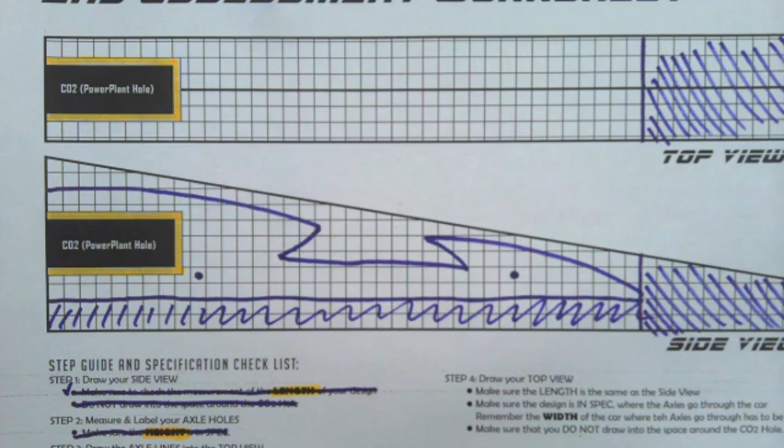Hey sixth grade, this is the instructional video on the top view for your second assessment worksheet. In the last video, we did our side view and made sure we went through our step guide and specifications checklist to confirm all specifications were correct for the side view design.

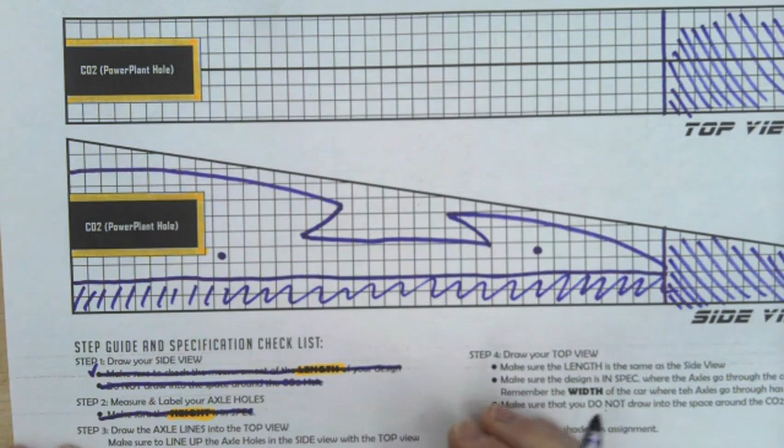Well, we have to do that same thing for the top view. Since we ended with step 2, we're going right on to step 3, and the same rules apply. If you know the specification and you're 100% accurate on it, cross it off. If you're kind of iffy about it, just put a check mark next to it. This way, when you hand it in, we can go over the checklist together and I can help you with the areas you don't know.

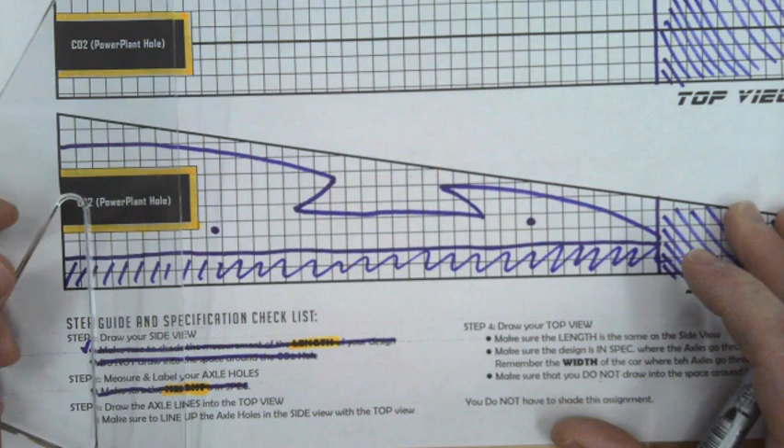Step 3 of this second assessment worksheet says we have to draw the axle lines into the top view. Just like we did with our brainstorming ideas, we're going to line up where our axle hole was with our triangle and draw a line in the top view. Remember, these must line up correctly. You're not making two different cars here, so the axles must be 100% accurate when we're lining them up.

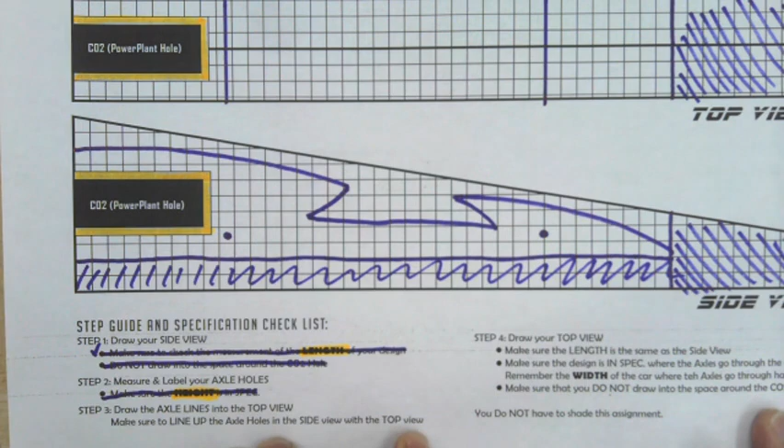Now that we have our axles in there, it says make sure to line up the axle holes in the side view with the top view, and that's what we did. So we're good there, I'm just going to cross that off. It's not a specification, but it tells me that I'm lined up and ready to go.

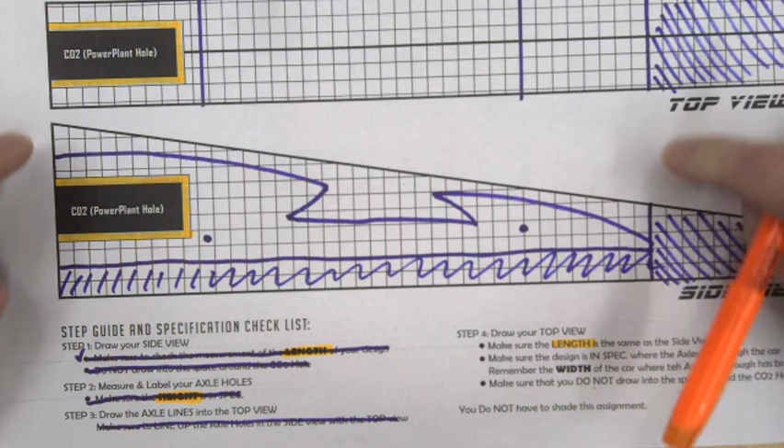Now we're going to get to the specification portion of this, and I'm going to bring up my highlighter. It says we have to make sure the length is the same, and we are. We set that up at 9.5 inches in our first one, and it is 9.5 inches in our second one. I made sure I ran that length up, so we're good on that.

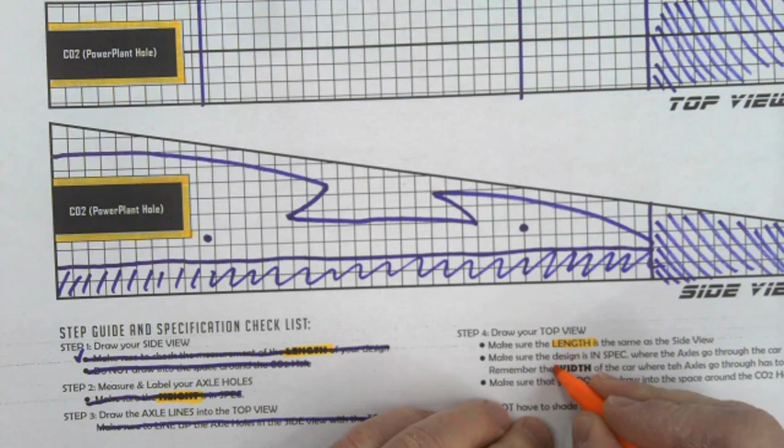Now we have to get in spec where the axles go through the car. We have to remember the width of the car at the axles that go through it to be in spec. In our case, the width is 1 3/8 inches to 1 5/8 inches according to the specification.

So I'll get my inch worksheet out and find out where 3/8 of an inch is. In this case, we're talking about 1 3/8 inches, so that means it's after the 1, in between 1 and 2. 1 3/8 inches is here, and 1 5/8 inches is here.

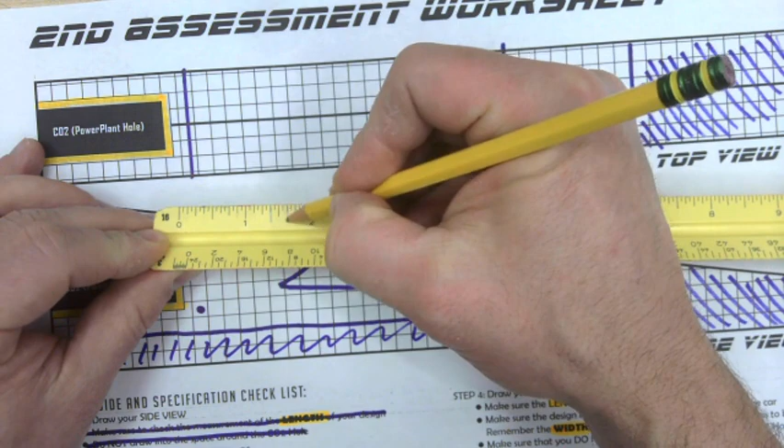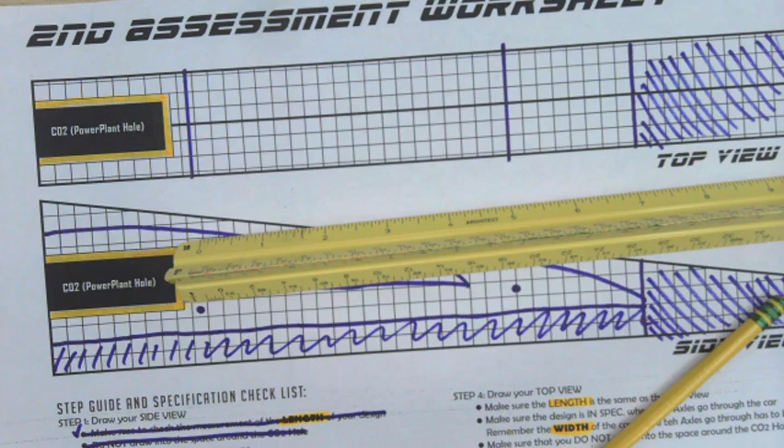For example, here's the car that I have in class. I left the wheels on here, but the other wheels are back here, so there are axle holes here where my other wheels would go. Where the wheels go through the car, where that axle goes through the car in both cases, you can see how the car gets wider. It's actually the same width as a piece of paper—I lined it up so you can see how it's the same thickness.

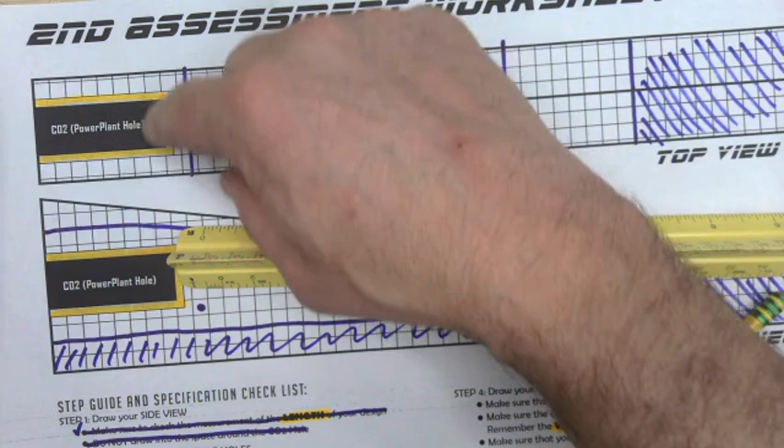Now, where those axles go through the car, you are not allowed to go any thinner than 1 5/8 inches. I've labeled it here from 0 to 1 5/8 inches—that is the actual thickness of the piece of paper. 1 5/8 inches: you are not allowed to go any thinner than the highlighted marks when it comes to your design.

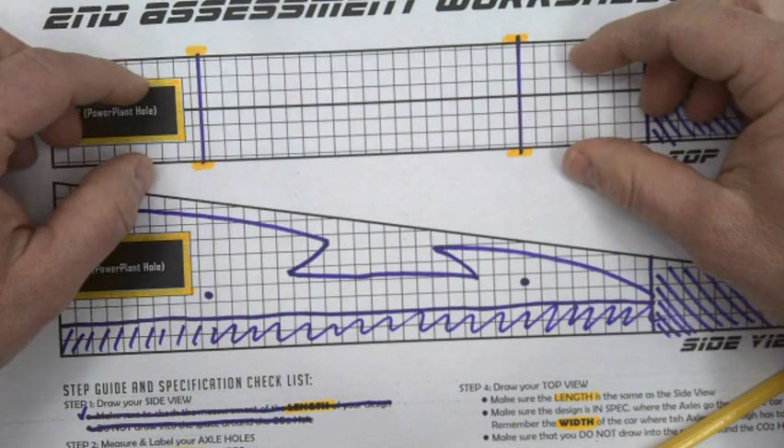So you can't go any thinner than 1 5/8 inches for this document. Although there is a minimum, if you did that minimum and started sanding it down on both sides, you wouldn't be at the minimum anymore and your car would be out of spec. Just like when we talked about the side view, if you sanded down your car and it was 8 inches, you'd go less than 8 inches and be out of spec, and we'd have to snap the car. But we don't want to do that.

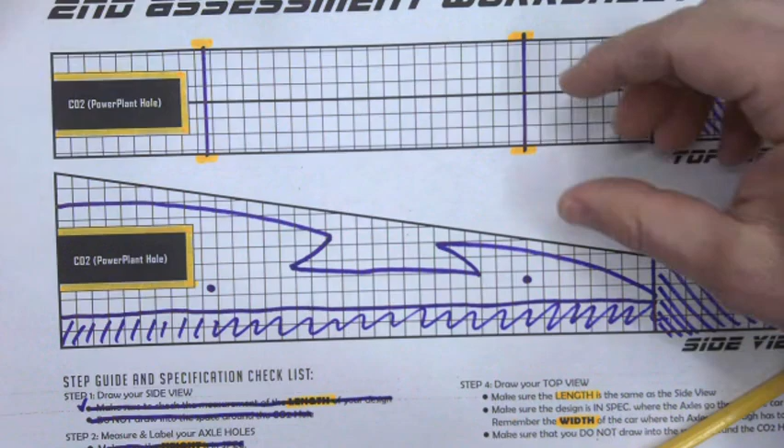So we're going to make sure we are in spec. Wherever the axle goes through the car, our design has to be as wide as we can make it. When I start designing this, I'll do this one in red, and I'm going to make sure the design goes as wide as I can for at least 2 squares.

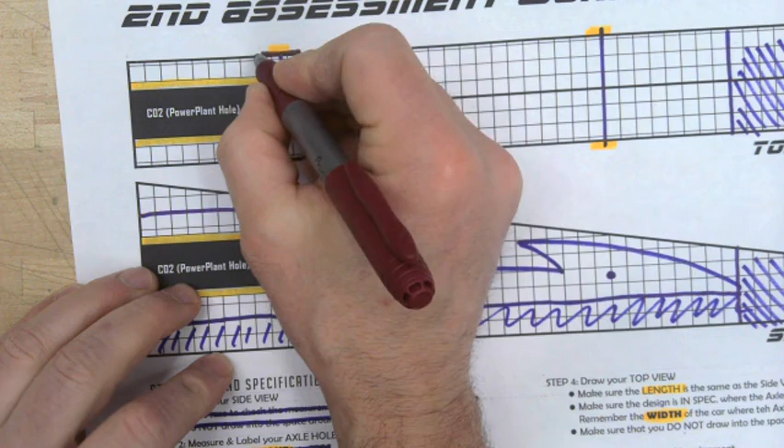There's a reason I want it to be flat: I can always sand it down to a point later. But if I cut it out to a point first, I could cut too far and slice my axles off. If I go out wide, then go straight across, then come back in, I have some room to make a mistake, and I can always sand it down later.

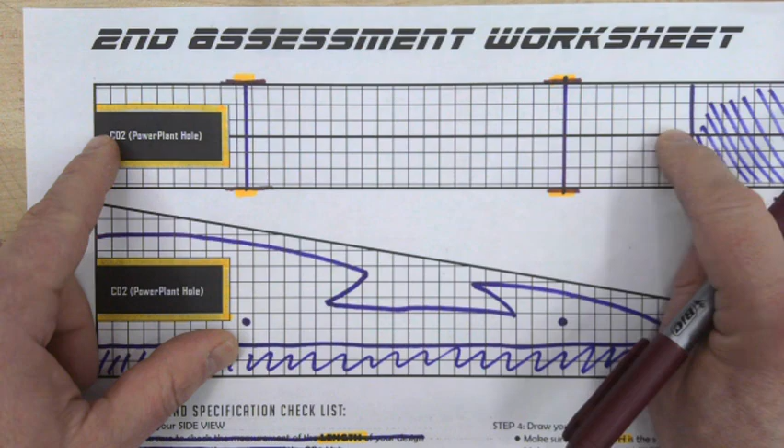Now, the other part of this is that this center line right here is our line of symmetry. So whatever we're making on one side has to be the mirror image of whatever is on the other side.

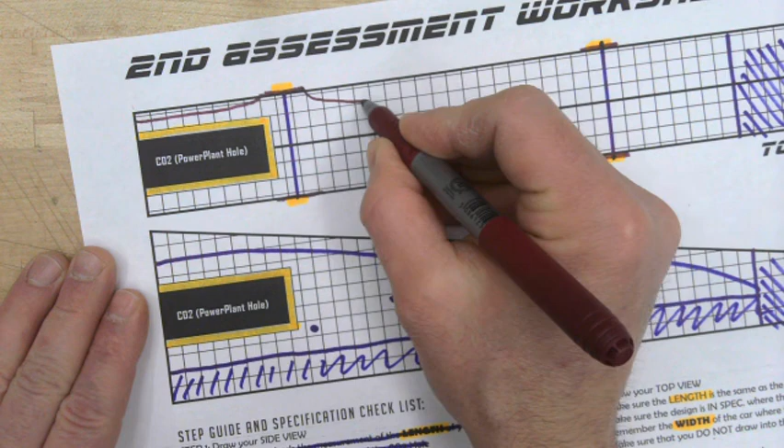So here we go, I'm just going to make a design, and I'm going to keep this simple. I don't want to make it too crazy.

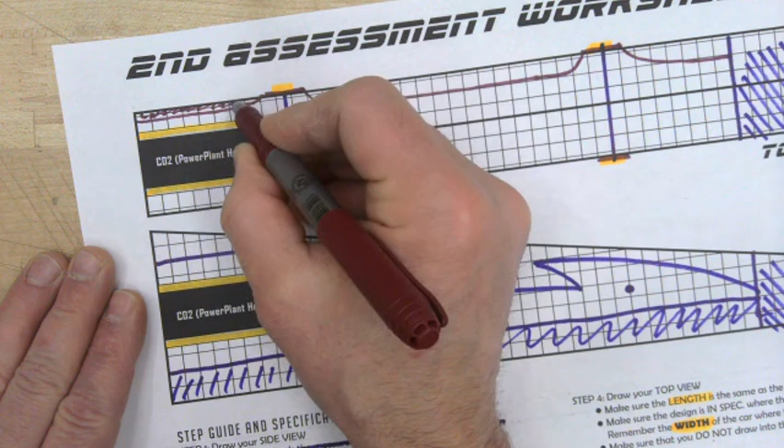So there's my design, and like I said, I wanted to make it fairly simple. Now I'm going to do something in this top view that goes against what I told you in the side view: I'm making it symmetrical. So whatever I did over here, I'm going to try to do on this side. Use your graph paper to draw your lines so it comes out nice and even.

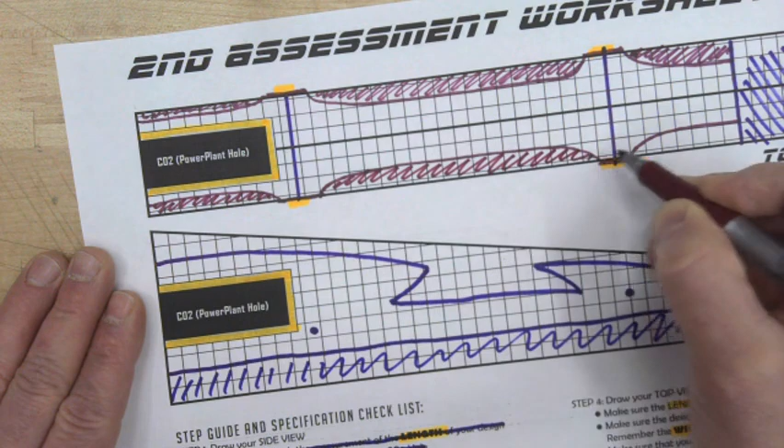What I'm going to do in the top view, and again you don't have to shade this out, I'm just doing it for the demonstration here.

What I'm doing in the top view that I did not do in the side view is I'm going to leave this flat in the front. The reason is because if I've gone down to a point in the side view, it's okay if there's a flat front here, because the wind will go over the top of that. It should be okay, you'll be streamlined. So it's fine if you leave it flat — you don't always have to come to a point here, you can keep it flat.

But if you take a look at my top view now, it's symmetrical — both sides are equal. Where the axles go through it, I am as wide as I can be, 1 5/8 inches on both sides of those axles, and I am in spec.

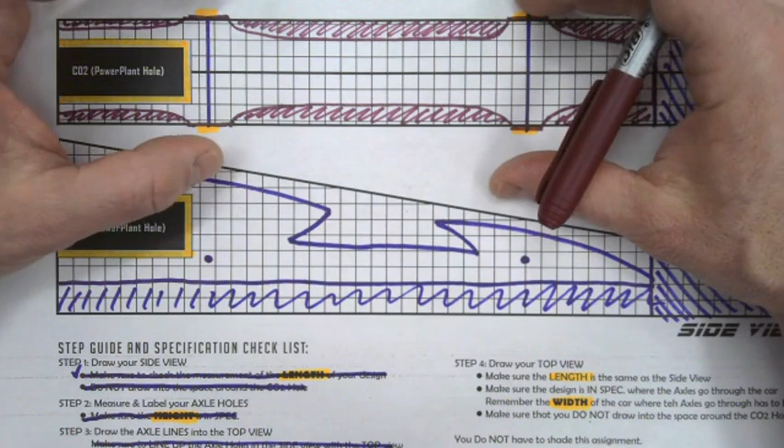So if I know my length is good, I'm crossing that off. My specification where the width of my axles is good — that means it's all the way out on both of these axles — I know I'm at 1 5/8 inches, so I'll cross that out.

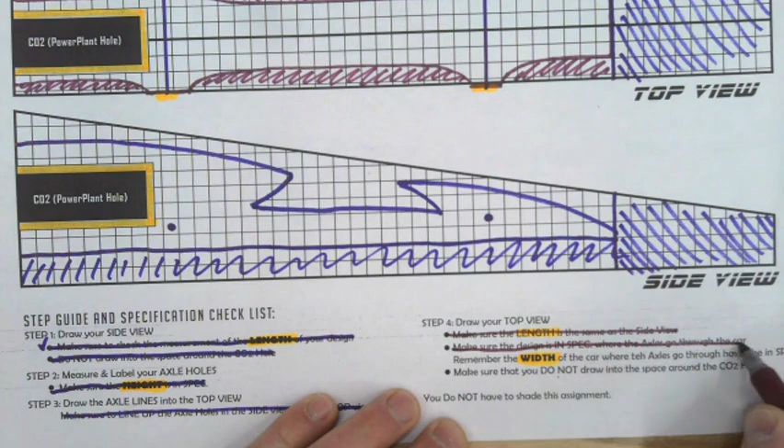And I did not draw into my CO2 cartridge hole. It also matches up here with my orange area — I did not draw into that, so that means I'm good there, and I will cross it off.

Once I have everything done, whether it's checked or crossed off, I am done with my second assessment worksheet, and I can go and submit it for review. Good luck — if you have any questions, please ask.